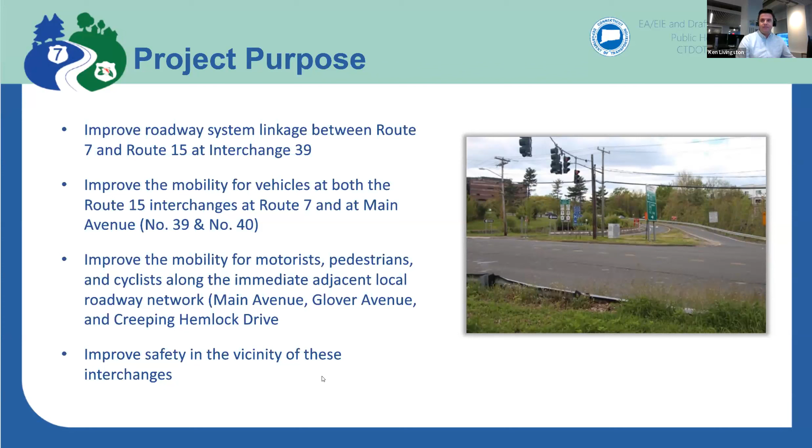The project need addresses specific deficiencies - we talked about the linkage between Route 7 and Route 15, addressing substandard acceleration and deceleration lanes, and different things that contribute to safety throughout the corridor. For mobility, we provide local road network improvements to Main Avenue, Glover, and Creeping Hemlock, improvements to bike, pedestrian, and transit facilities, and address ADA compliance issues in the project area.

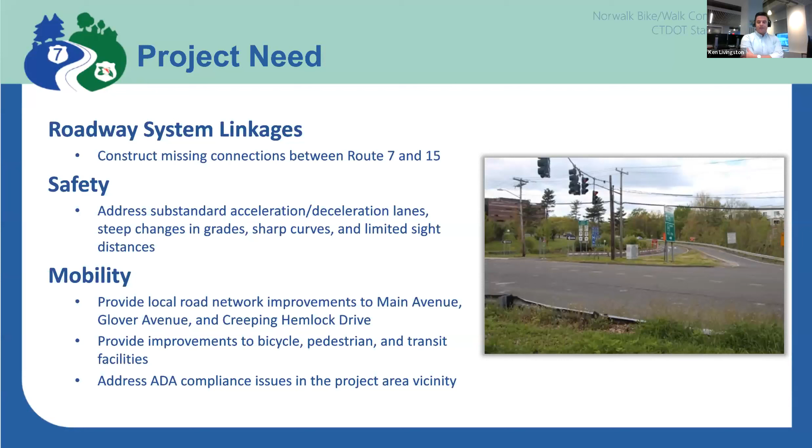These missing connections - looking left to right on the screen is Route 15 and the Merritt Parkway, then Route 7 at interchange 39, and interchange 40 is Main Avenue. Currently these movements shown in red do not exist today at the Route 7, Route 15 interchange. A lot of these connections are the missing connections we're talking about that we're trying to restore as part of the project.

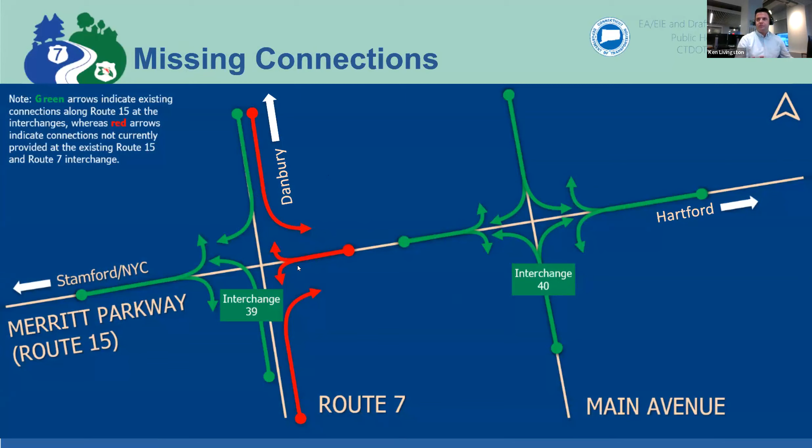I'm going to pass it off to Emily for a bit to talk about crash history and safety along the corridor.

Alrighty. So you can see by the legend on the right, we looked at crashes from 2015 to 2018, using half-mile segments, and did a study of the whole Merritt Parkway corridor in Connecticut. We found that the purple, with over 300 crashes at interchange 40, is the highest number of crashes along the entire corridor. So that definitely warrants safety improvements along our study area.

And interchange 39 has 62 crashes - not as bad as interchange 40. This points out the deficiencies we've talked about, known along a lot of those ramps at Main Avenue. If you're familiar with the corridor, a lot of those existing tight loop ramps are very deficient geometrically, which, as you can see from the crash data, is where this safety issue comes from that we're trying to improve.

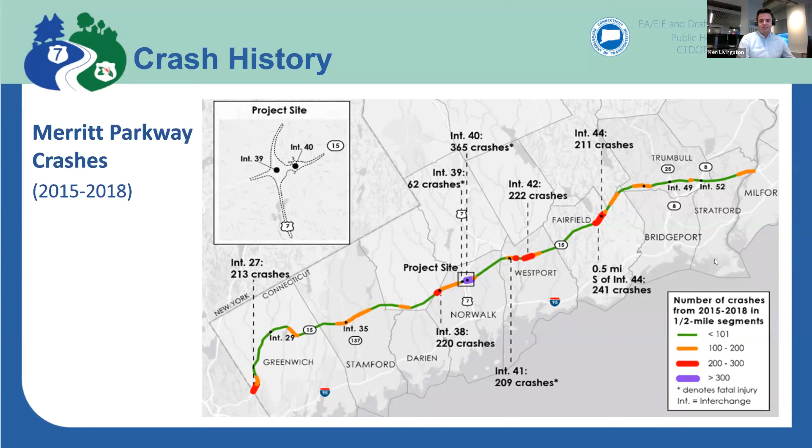Just some aerials and overviews of the project location and existing conditions - Route 7 running north-south, and the Merritt Parkway through our project limits running east to west, or northbound/southbound through our limits. And then the Main Avenue corridor with these tight loop ramps. We have Creeping Hemlock there, and then Glover Avenue leading to the Merritt 7 district.

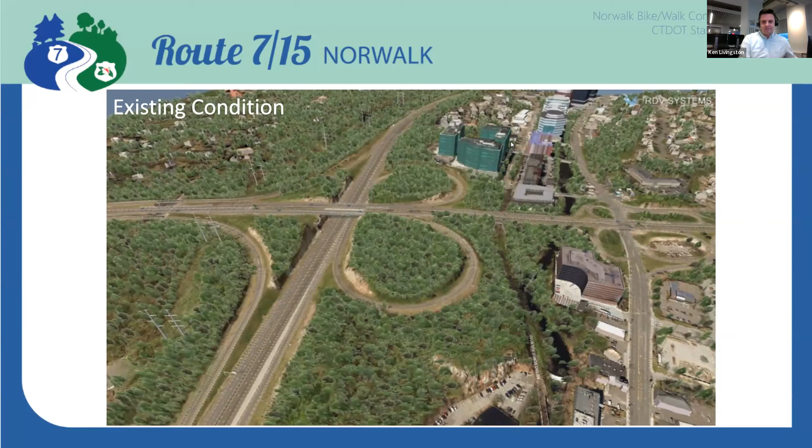As a part of the EA study and a part of the evaluations of all the alternatives, we looked at between 25 and 30 alternatives to address the project purpose and project need. This came down to two alternatives that we looked at within the EA, the two final ones that we brought to extensive review.

This is alternative 21D, which provided a lot more interchange ramps and direct connections between Route 7 and Route 15. A lot of the movements we're going to be talking about locally between the two alternatives, in the local road corridor and Main Avenue, Creeping Hemlock, and Glover, would be the same for both of these proposed alternatives.

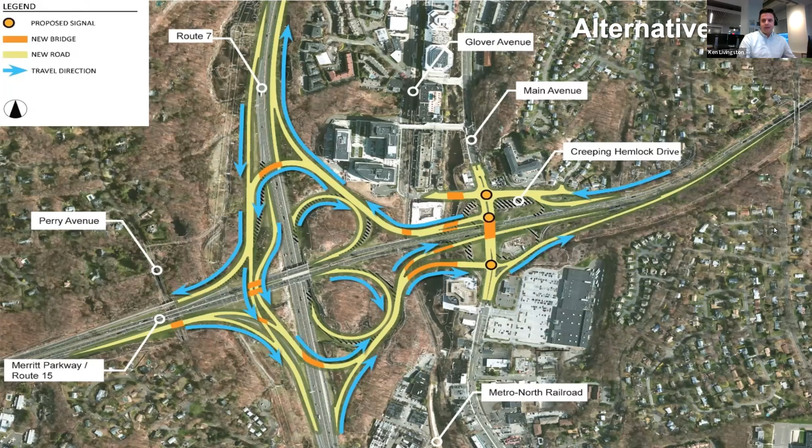And we get to alternative 26, which is what the EA document proposes as the preferred alternative. Like we said, on the local roads corridor, everything is more or less the same. But on Route 7 we're proposing 2 signalized intersections so we can provide those connections directly from the Merritt to Route 7, northbound and southbound in both directions. So this proposes changing the classification of Route 7 into more of a boulevard type corridor.

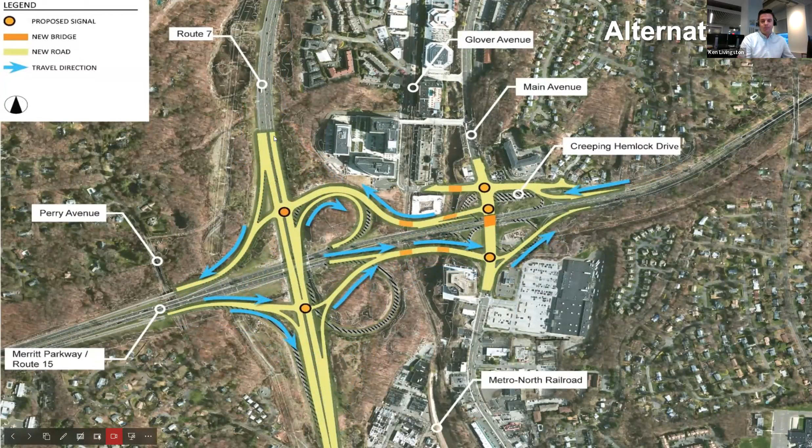So that covers the two main alternatives in the document, and alternative 26 is the preferred alternative that we're proposing to go forward with.

As far as our bicycle and pedestrian focus, I'm going to pass it off to Ken to talk about what outreach we've done so far and what we're going to continue with, and then some of the specific bike ped improvements we're proposing on the local roads.

Ken? Ken, you might be muted still.

Okay, there you go. It's great to see Jim Carter here also, who brings that long institutional knowledge along with Gary and myself on this project. As Jim will attest and some others, we've been talking about the pedestrian and bicycle amenities from the beginning on this project, understanding it's a core component of the project. You could see it within the purpose and need and project goals.

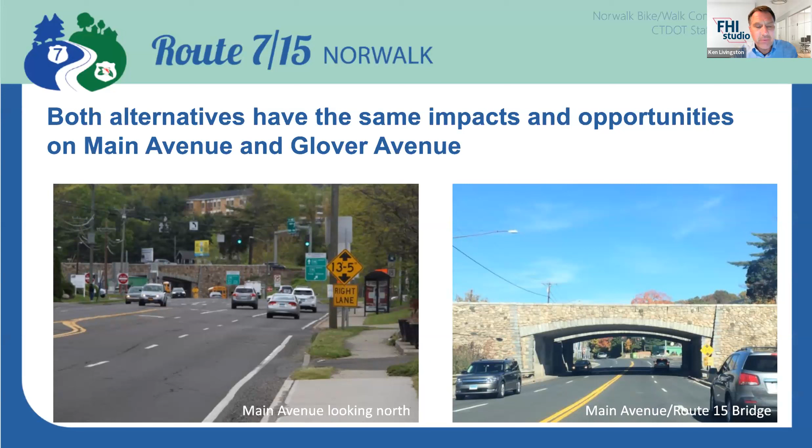So as we move down this process, we were able to really consider a wide range of alternatives for a wide range of improvements for both alternatives. Next - and what are those opportunities for improvements?

Well, obviously if you're out there now and you're familiar with it, and we did receive some comments on this area, there's some substandard conditions and sidewalk improvements, signal improvements - all types of improvements are potential here. We were looking at considering bicycle lanes, bicycle signals through the intersections, additional signage as it directly relates to bicycles.

From a pedestrian standpoint, obviously many of the sidewalks are in a bit of disrepair, so there are opportunities for replacement, but not only replacement, but widening of those sidewalks, potentially creating buffers between where people will be walking and the actual roadway and vehicles. Obviously signal improvements and bus stop amenities, all to create a better environment for pedestrians and bicyclists, not only through our project area, but along the area, connecting some of the businesses, and also, as importantly, connecting up to the Glover Avenue and enhanced new train station.

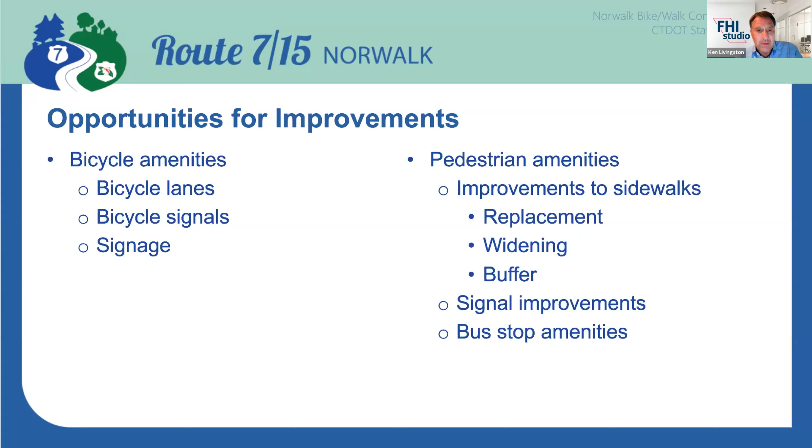So from there, we had a range of design options. This is kind of looking at what this proposed typical would be, going up north on Main Avenue.

Like Ken had said, the buffered bike lanes that we're looking at, the new proposed sidewalks certainly provide better facilities than the existing condition, as you all are very familiar with the corridor. Additional sidewalk width, this doesn't capture the full limits here, but there's also wider shared use paths throughout our project limits, and additional improvements like Ken had touched on.

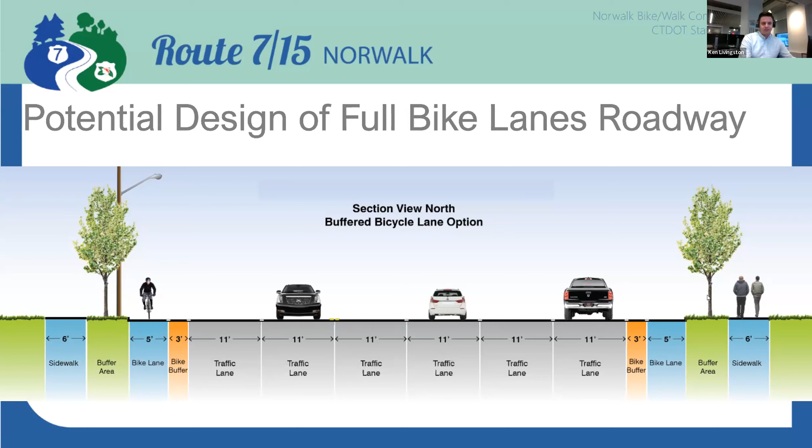This is just a snapshot and section of Main Avenue as a potential option that we're looking at now for what we're proposing. And then the other section that we wanted to look at here.

This really provides a good picture of that wider envelope that we have now underneath the Main Avenue Bridge. As part of our project, we're proposing to replace the Main Avenue Bridge in order to widen underneath and provide better facilities, not just for motorists, but for pedestrian and bike facilities underneath there. As you all know, the existing pedestrian facilities, the sidewalks underneath the Main Avenue Bridge, are substandard. So what we're doing here is proposing these improvements underneath the bridge to provide better connections throughout this corridor of Main Avenue.

One thing we wanted to show is just the overall project limits. So the intersection at the south at the Stop and Shop, and then the intersection to the north, just north of Creeping Hemlock along Main Avenue, is where we stop. On the west side on Glover Avenue, right before the railroad crossing, just east of that, going through to a new proposed intersection. As you know, the intersections are currently off-centered and tying in at different locations, so we're realigning Glover Avenue to tie in at one proposed intersection location. And then Creeping Hemlock is also being realigned to the north to create this signal.

So north-south, we are proposing the buffered bike lanes, the additional widened sidewalks, and bike ramps along these facilities. A lot of those improvements that Ken mentioned before, and the opportunities, are things we're looking at now. Obviously this is just a snapshot in time of where we are with design. As we continue to look at further FHWA guidelines and review with ConnDOT and the project team, there's additional outreach with the public. This is just a progress moment of where we're at right now with the project timeline.

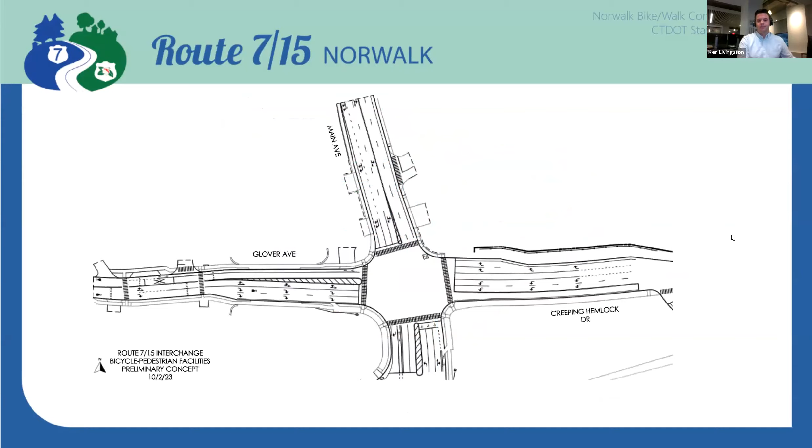And then the last comment you had, Tanner, was about roundabouts. As I mentioned, we did look at I guess 25 to 30 different alternatives, and one of the alternatives in the EA did include roundabouts at Route 7, like you said. I'll pass it off to Emily to talk about that analysis and what we got from it.

Thank you, Reed, and thank you, Tanner, for the question. I remember the questions from the public hearing a month ago, and you kind of alluded to this, Tanner, but it is a matter of the significant peak hour demand that will be in the future. The number of vehicles that will pass through the roundabout are nearly double the threshold recommended by the Connecticut DOT Highway Design Manual.

So that leads to level of service F operation. The volume is much higher than the roundabout capacity can accommodate, unfortunately.

Gotcha, thanks for that report. And just to translate for the lay people here, level of service F means lots and lots of backups, right? It means congestion, yes.

Level of service clarification. I'll just add though, Tanner, you asked about Route 7, but we also looked at roundabouts right at Glover Avenue, and that was even more of an issue from sizing and spacing standpoint. But Emily can add on to that. We even looked at that one as a roundabout option.

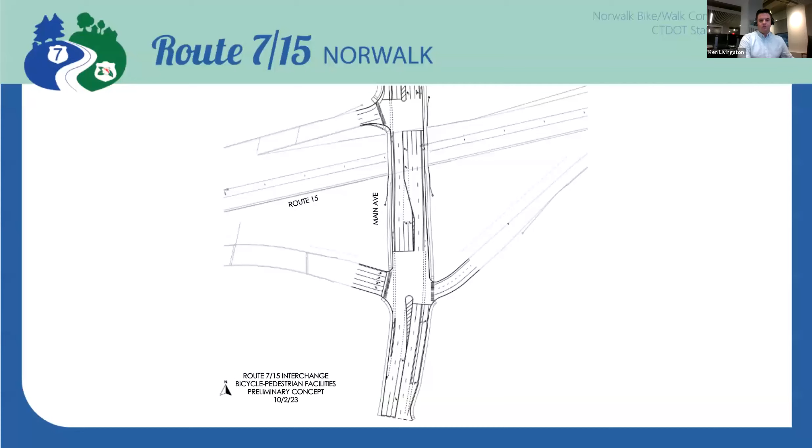Sure. The one thing we did want to point out, looking at this—this is the section underneath Main Ave. So with introductions to those signals where those ramps come in, obviously the tight loop ramps we had at that Main Avenue interchange covered both directions, northbound and southbound. Now we're removing them, combining them, and tying them into the signals. We're continuing to look at the design of those signals and ways we can optimize that. Preliminarily, looking at the amount of traffic from combining those ramps is what we're looking at right now, and as the signal design progresses further, we'll keep looking at ways to optimize it.

Sorry, just a brief response, but Emily, anything to add from a traffic standpoint? No, you covered it well.

Okay, thanks, Reed. So is it fair to summarize by saying that the reason we've got 6 lanes here has a lot to do with the fact that we're in the middle of an interchange, and that currently the interchange is kind of poorly designed, and these extra lanes are not as much for traffic throughput on Main Ave as to make the interchange work better? Correct. Yeah, the interchange ramps and how they enter both of those directions are now being modified with these movements. Gotcha, okay, thanks for the clarity on that.

It was pointed out to me that we have a question in the Q&A on Zoom, I think it's a pretty short answer. The question is from the City Hall Neighborhood Association: will this project be coordinated with the Exit 16 interchange project? My guess is that's a no, because the project areas don't overlap at all, but if there's something else to say, go ahead.

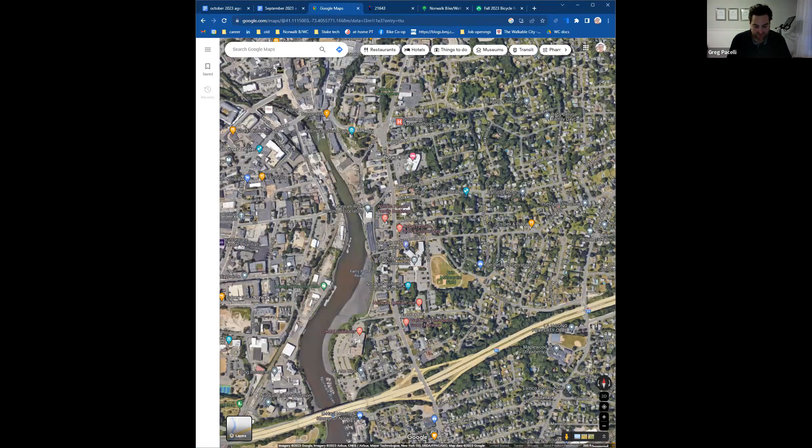Obviously last year, as part of the capital budget request, TMP did request some money for a corridor study for this section. We received a portion of the requested funding for the corridor study, so that percentage of funds is going to be for kind of preliminary work at this point. The first thing is understanding the right of way we have to work within, to establish a base map for us, just to know what the limits of the project can be, especially expanding out from the roadway to the sidewalk and to private residences and private property. So that's going to be kind of the first thing that gets done as part of this.

We're finalizing right now a contract where we received bids for a on-call surveyor, which we're reviewing at this moment. Once that's established and our selection made, then we can start a process for collecting survey and getting those limits, expanding outward from the project area.

But keep in mind, from a resource allocation standpoint, we're still performing design and construction of Wall Street, which has been in the works now for a few years. We have full funding, pretty much almost full funding, I should say—we've gotten a lot of money towards that. East Wall Street is set for construction beginning early next year. We're in design for the rest of the Wall Street corridor right now.

Seaview Avenue, we're finalizing concept design right now. We had the two public meetings, obviously, and we have a commitment to the community for a roundabout at Gregory and 5th. So we can't forget about these projects that we've already begun to design and plan for over the next handful of years.

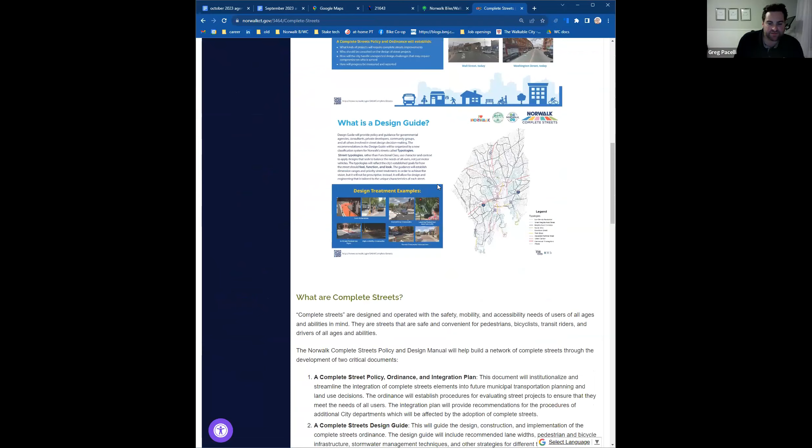Great, and here's the link to the presentation that you just alluded to, right? Mm-hmm. And then there's the boards that were up as well during the meeting. And the demonstration project will be in April 2024. So we can talk about it throughout the wintertime, but we definitely want to gather as many volunteers, and obviously the Bike Walk Commission, we'd like to have major drivers as that to gather as many people as possible.

Yeah, plus one to all of that. So my invite for everybody is to please fill out that survey as well. So you got two assignments, fill out both surveys. Any questions about the Complete Streets project, about the public meeting that was on Thursday, or any adjacent items?

Greg, one last question for you. Do we have an estimated, I know I'm asking about timelines, and I know there's not always an answer. So, but in case there is an answer, do you have any sort of estimated timeline for when the draft of the actual design guide will be ready?

So it's supposed to be worked on throughout the fall, wintertime. So I'm pretty sure by midwinter, so like February, March, we should have a draft at least. By then, because we're supposed to be wrapping up in the springtime, that's when we're going to be doing the demonstration project. So we should have a preliminary draft around that time. So we'll keep you posted as we progress through the late fall, early winter.

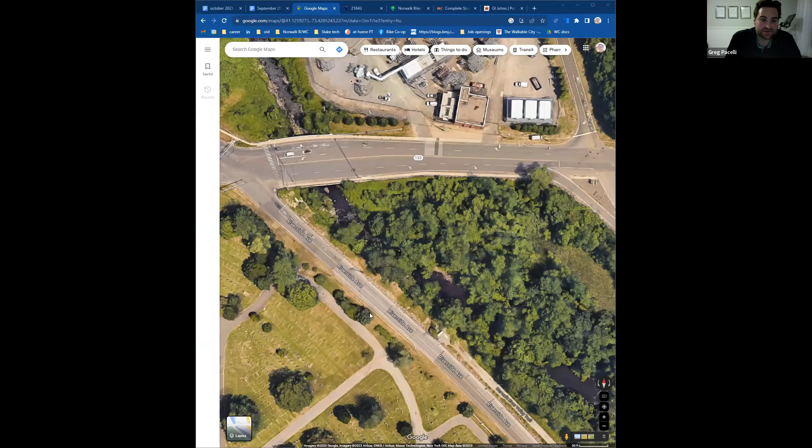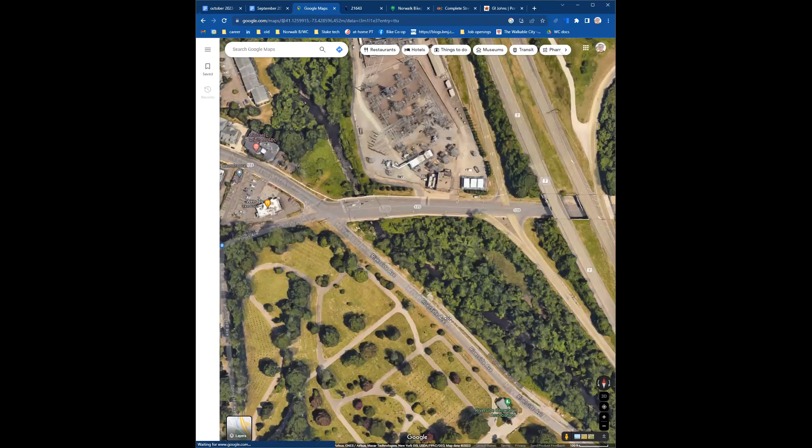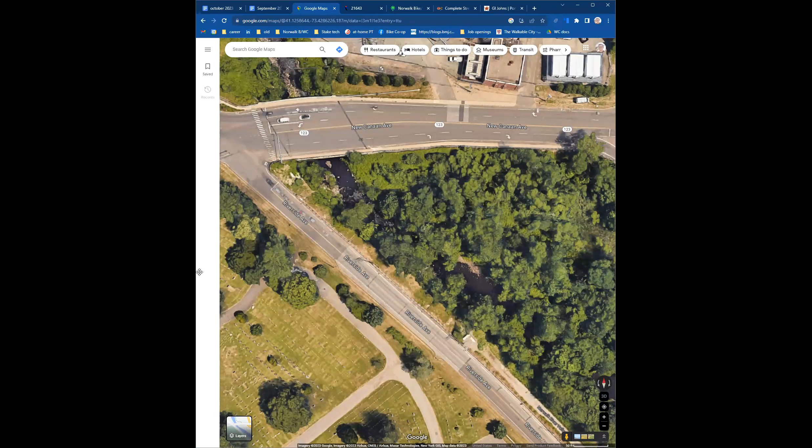The only add that I can put on is, and this is informal, I think the steel work is now all in, and what I'll call the boardwalk, although they're not boards, the boardwalk surface, those units that form the boardwalk are on site. So things are moving, would be my comment. So I'm encouraged, and again, tip a hat to all the team that has persevered here.

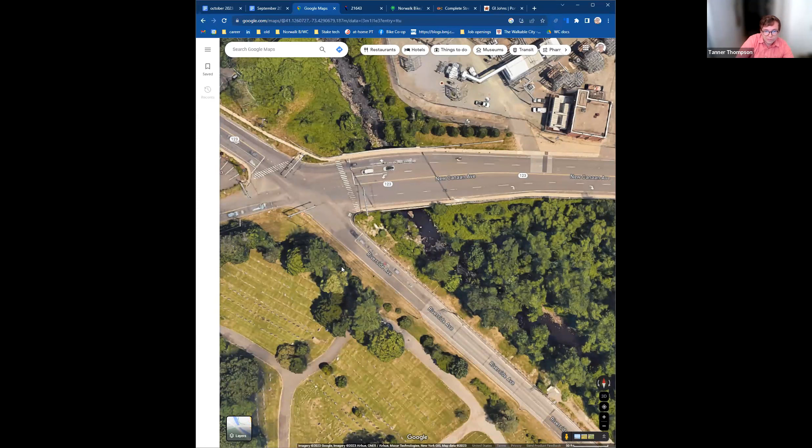Yeah, plus one to that. Obviously we have no official word, but it seems based on this trajectory that this is likely to get done before the end of the season. I spoke to Jim earlier, his target was by the end of this month, don't hold me to it. Well, that will be amazing, and I look forward to using it whenever it gets done, hopefully by the end of this month.

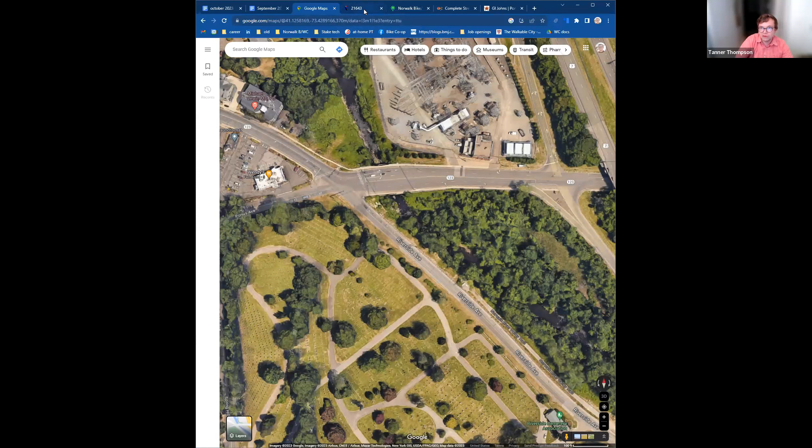Okay, I don't think there's anything else to report there besides additional speculation, and we've done plenty of that. That brings us to the end of our agenda, with the one exception of approving the meeting minutes.

Last month we did not vote on the minutes. This month I am pleased to report that I have read the minutes from both meetings. Darlene, you're still with us, right?

So Darlene's not here tonight, she's on vacation. Yeah, so she's going to watch the video and she'll take the minutes going forward. We sent you all the minutes earlier this month from September's meeting, so you all got a direct link to it.

Anybody else have comments on the minutes other than a motion to approve them? Okay, in that case I'll entertain a motion to approve the August minutes. Christine, thank you, do I have a second? Emily and Nick, and then I'm the only other commissioner here. Oh no, we have Manny, I forgot about you. Would you like to? I'm not able to vote yet because I haven't been sworn in. Oh, you haven't been sworn in. Okay, well I hope you're able to do that soon. But in the meantime, I think that means it passes unanimously.